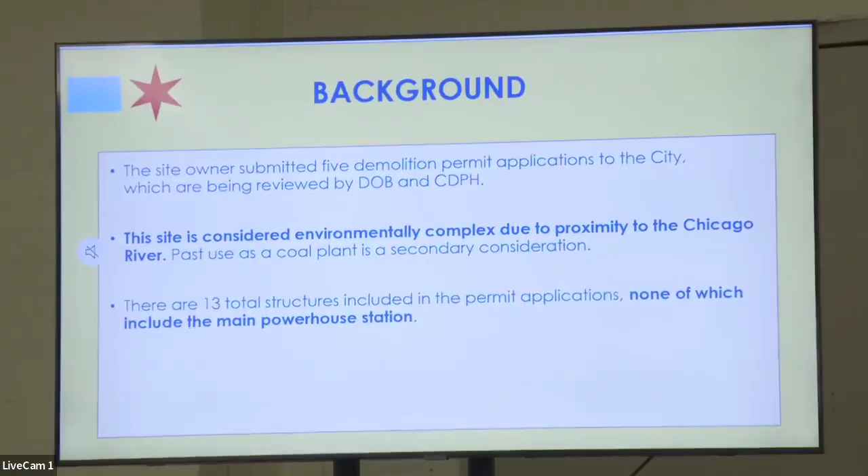So for some background, the site owner has submitted 5 demolition permit applications to the city, which are being reviewed by the Department of Buildings and the Chicago Department of Public Health. This site is considered environmentally complex due to the proximity to the Chicago River, past use as a coal plant is a secondary consideration. There are 13 total structures included in the permit application, none of which include the main powerhouse station.

And with that, I will turn it over to Commissioner Hopkins for the Department of Buildings.

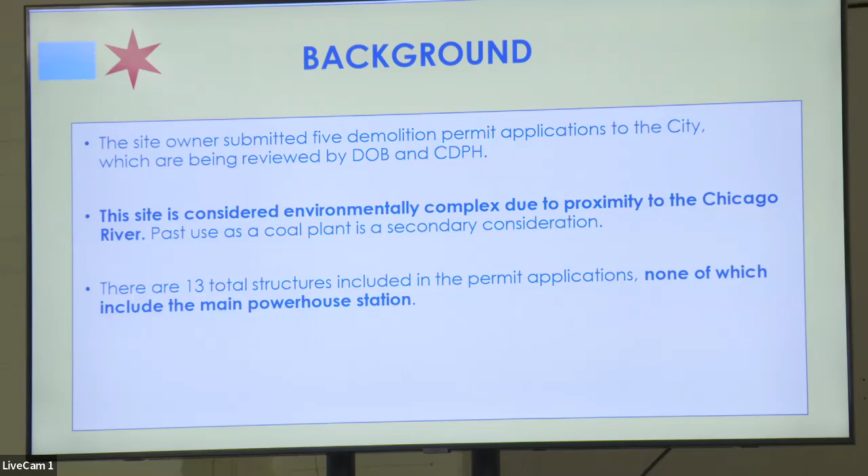Good evening. I am Marlene Hopkins, Department of Buildings Commissioner. Thank you for joining us to discuss the partial demolition of the Fisk generating station. For environmentally complex demolitions like this one, my department works in continuous coordination with the Chicago Department of Public Health to ensure every phase of the demolition is executed safely and responsibly.

This collaborative approach reflects the lessons we've learned from past projects and our commitment to prioritizing the safety of Chicagoans, especially those living in communities with existing environmental challenges. We take our responsibilities seriously, not just to ensure compliance with the building codes, but to protect both the skilled workers completing this project and, most importantly, the residents who call this community home.

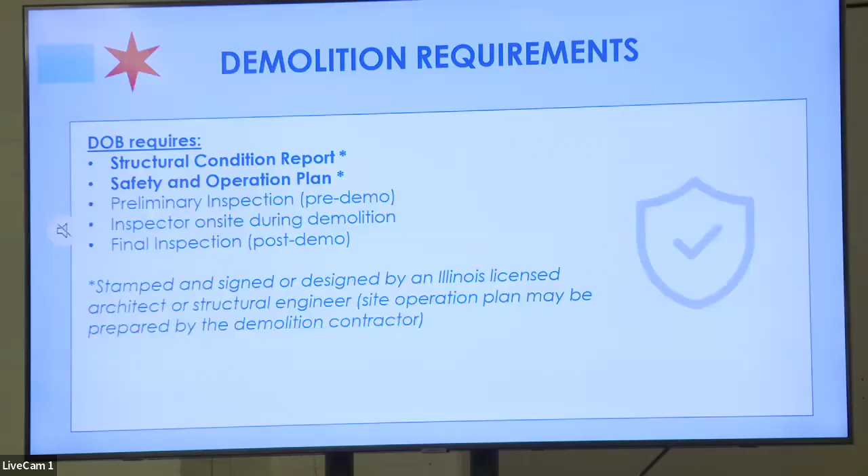We also require a safety and operation plan, which, similar to the structural condition report, must be stamped, signed, and sealed by a licensed architect or structural engineer in Illinois. It is also acceptable for the site operation plan to be prepared by the demolition contractor.

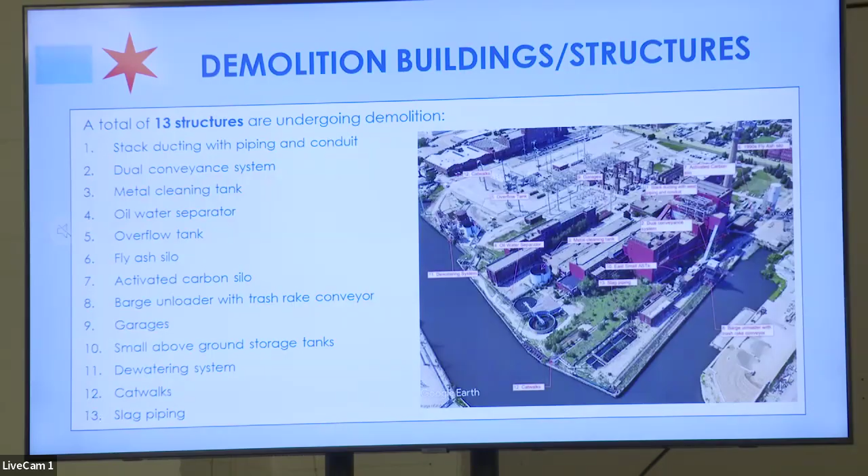Next slide. There are 13 structures to be demolished, separated into the following groups: stack ducting with piping and conduit, a dual conveyance system, a metal cleaning tank, an oil water separator, an overflow tank, a fly ash silo, an activated carbon silo, a barge unloader with trash rake conveyor, some garages, small above ground storage tanks, a dewatering system, numerous catwalks, and slag piping.

Next slide, which should detail the permits information. So the 13 structures are separated into 5 groups. These groups correspond with the submitted and filed demolition permit applications, and the numbers are cited below each group.

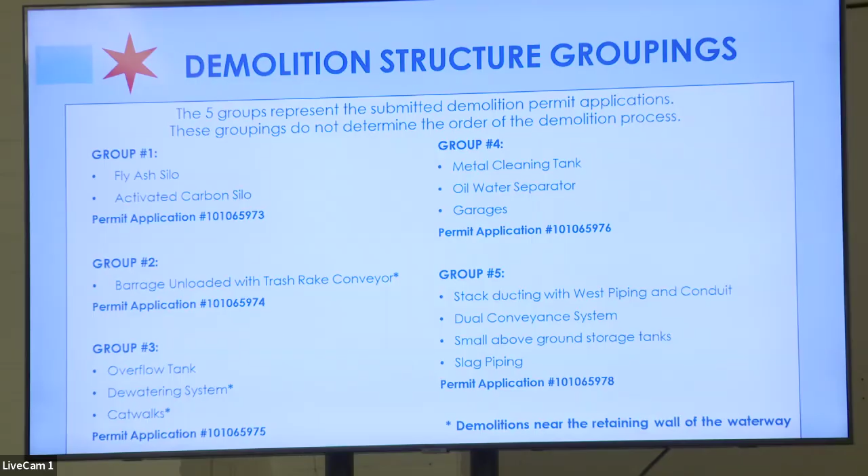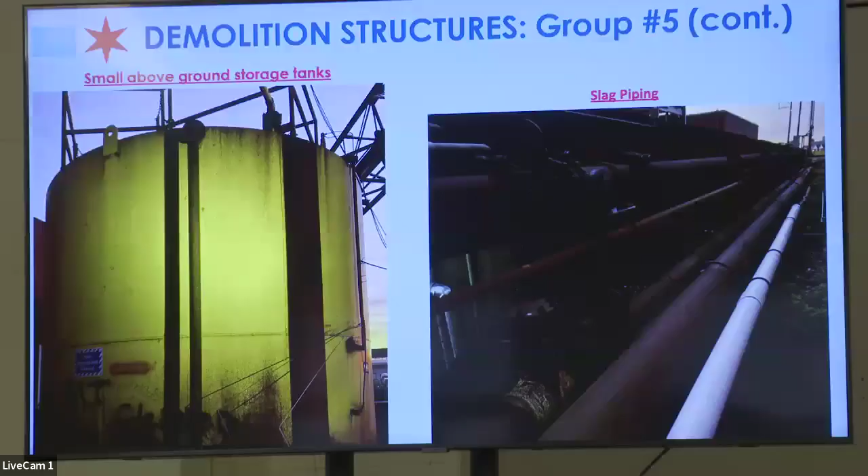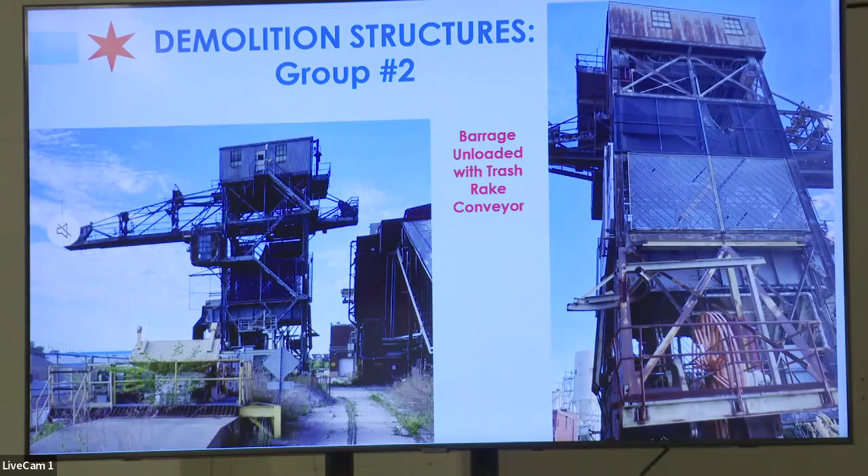Next slide. We're on number 2. Demolition structure groups number 1 - next slide, because it's the 5 groups. Group 3 - you want me to go through all of them? You want to go back? Go back to group 1. Okay, group 2, which shows the structures associated with that permitting group. Group 3. Group 4. And group 5.

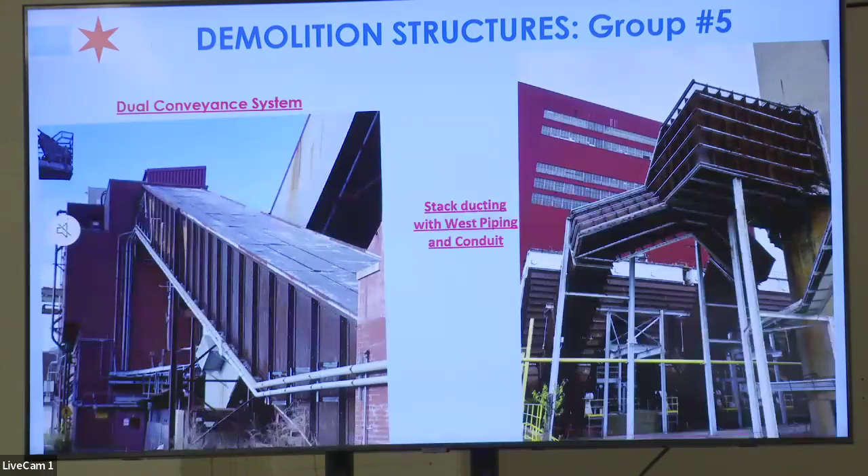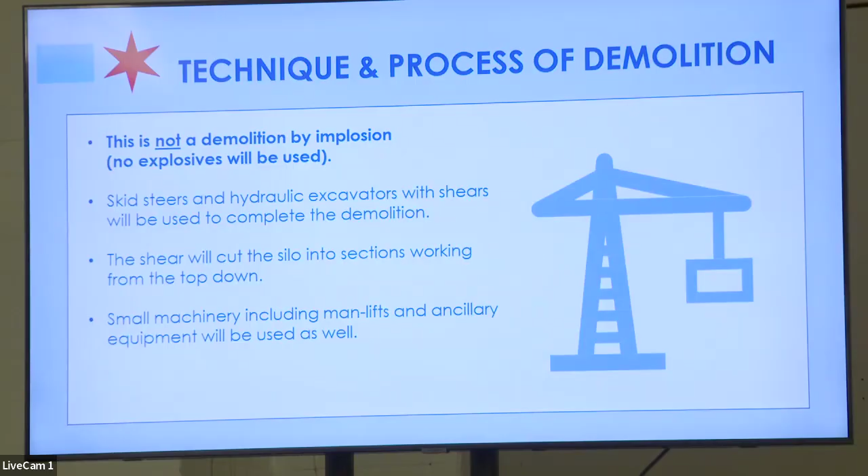Next slide. This is not a demolition by implosion, meaning no explosives will be used. The mechanical demolition technique for this site utilizes skid steers and hydraulic excavators with numerous attachments. The grapple is one of the attachments. A hydraulic breaker is another attachment, and there is a processor attachment. In addition, there's a skid steer and a front end loader. So this is a mechanical demolition with no explosives being utilized.

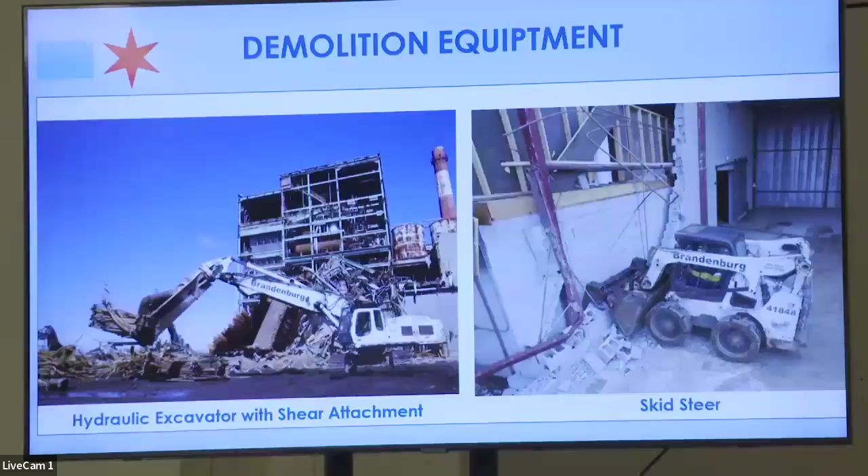And at this time, I would like to thank you, and I will pass it over to my colleague, Commissioner Dr. Ige.

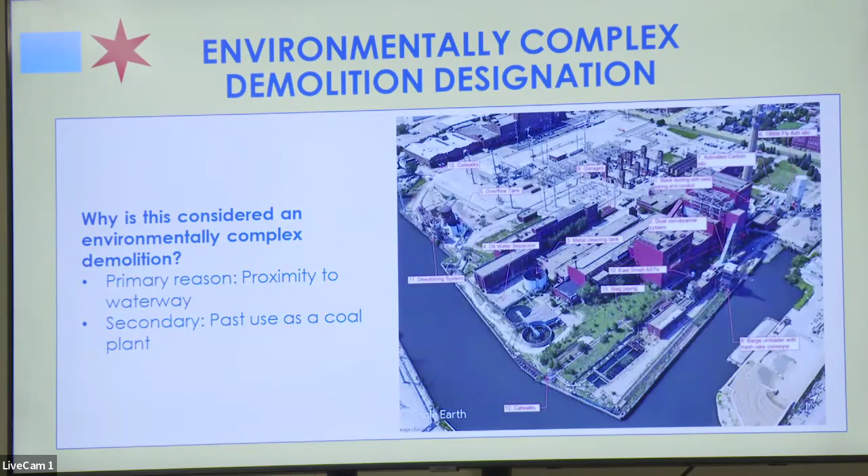The designation of environmentally complex is done by the health department because of our interest in public health. I have explained the two reasons why we're interested in this particular demolition, and we have tagged it as environmentally complex: proximity to the waterway, and past use as a coal plant.

When the application is submitted to us, there are a few things we look out for. Asbestos must be abated before the building starts coming down—that has been completed. Second, any hazardous waste must be removed before you start bringing things down. We don't want things getting into the water or into the air. That has also been completed.

Inspect for lead, which is usually in the paint. We check before demolition if there's any chipping paint, etc. That has been inspected and completed before the demolition happens. Recycle and reuse at least 50% of uncontaminated construction and demolition debris—we want to be good stewards of the environment. If something can be reused, we want it to be reused, but that is after the demolition. Things that can be salvaged during or after the demolition should be salvaged.

So dust—by far this is what you are most concerned about. We get tons of questions. There is not a single day that I don't get an email about somebody worried about dust. So it is incumbent upon me to make sure that dust is not getting into the community and causing concern.

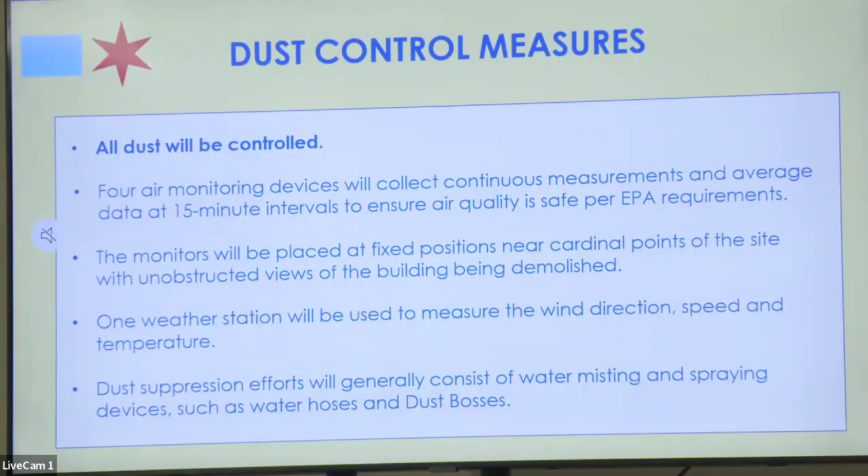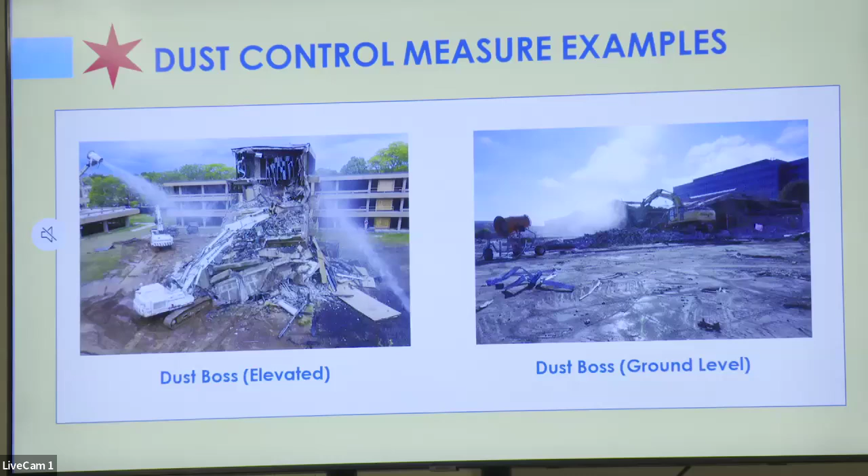Department of Buildings and Department of Public Health, we are twins in this process. We are always together. If our inspector is not there, DOB inspector is there, but our inspectors are both there. So when people ask me, is our inspector there, it is not just me. There is my inspector and there is a DOB inspector on site during demolition.

That is what we have committed to do. Before demolition, to make sure all requirements and controls are in place, they will be on site every day during active demolition hours, Monday to Friday, 7:30 to 4. We don't have overtime hours.

And they observe the demolition, they are on site. So we reassure our community we're there with our partners. DOB and CDPH have full authority. If they observe something, they can flag it for us. If we observe something, we can flag it for them. So 2 inspectors on site every time, every day. That is the agreement. They both have authority to stop any work and correct issues as needed.

Correcting issues is where we focus. If there is a problem, we want to identify it and fix it. If it cannot be fixed or they refuse to fix it, then things escalate. But if we identify something, we want to fix it and say, hey, no, Dust Boss, water, more water, clean this up. They do it, we're fine. They don't do it, we have a problem. Next slide.

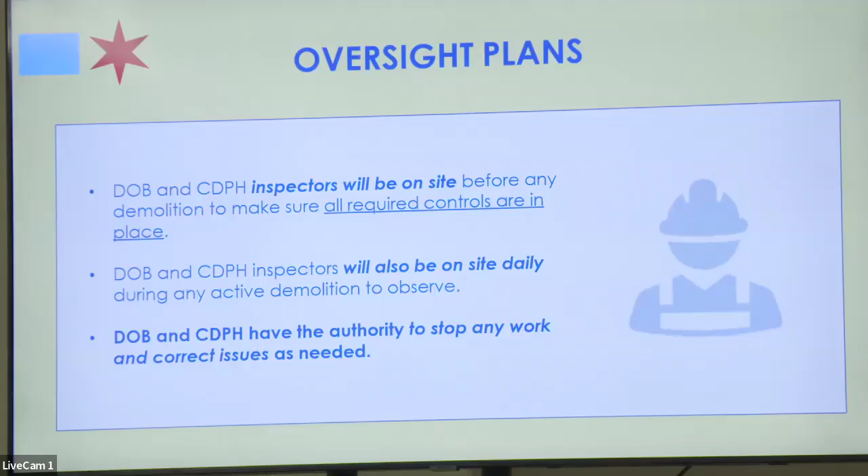So we are going to pass this to the contractor so they can give you more details. I have shared with you what we look out for. Then you will hear from them what they actually do. And we will again be on site to be sure that they are doing what they are supposed to do. Over to Brandenburg.

All right, you hear me? This is Paul Pujan with Brandenburg, project manager. Yep, we can hear you. Okay, so there is a slide deck, if they can go ahead and get that going.

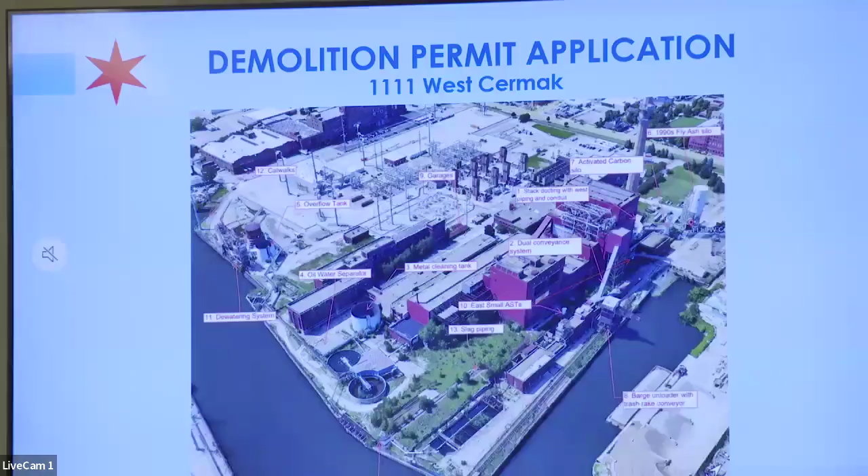So as already been discussed, there's 5 permits submitted for this work, and it's grouped as it was previously shown. The work, as it was kind of described, is all mechanical. It's going to be primarily the taller structures like the conveyors, the silos, barge unloader. These will be done. We'll bring in some cranes.

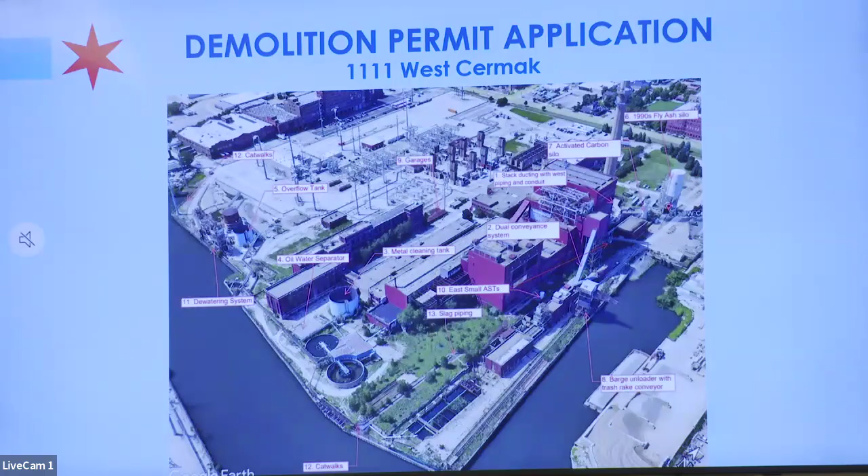We've already performed the engineering analysis for this, and it'll be a systematic removal in sections. We'll bring, say, the high angle conveyor, the barge unloader, down in sections, down to ground level. And at that point, we use our hydraulic excavators with shears to process the material so it can be loaded out into trucks and sent to recycling centers. So I can go to the next slide.

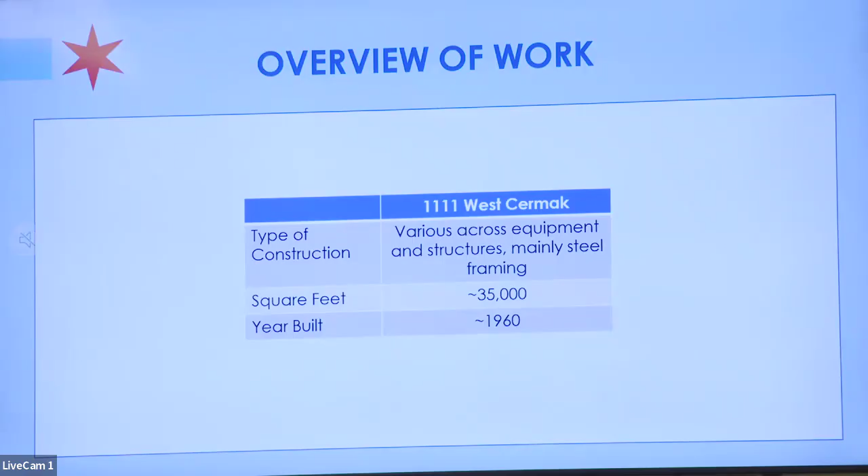Okay, so this is basically talking about all the various structures that we'll be demoing. Next slide.

So everything, starting in about April, we started reviewing the equipment and the structures. We've had the engineering analysis done and submitted to the city that everything is good for demolition. All the chemical and universal waste was removed. The universal waste includes things like light bulbs, any chemical like spray paint, things of that nature. That's all been removed and disposed of. Our engineer was on site and gave us a stamped letter saying structures are sound.

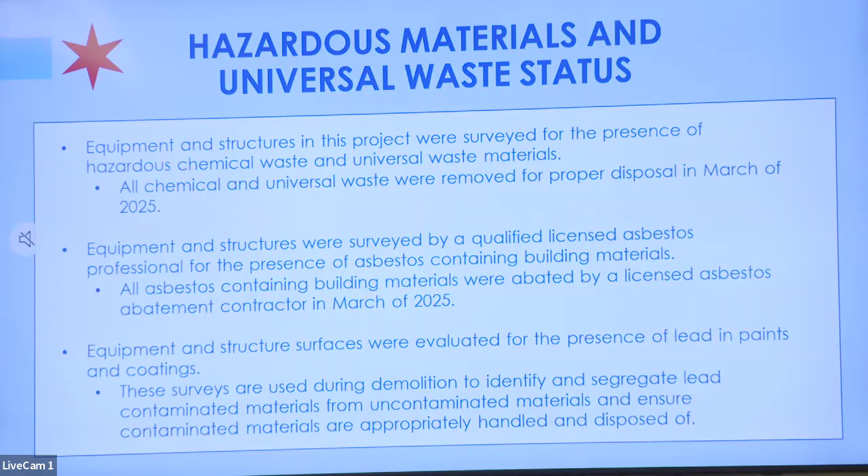All the asbestos was removed by Brandenburg, and we finished that work in March. And everything was evaluated for the presence of lead. And so anything that was identified will be segregated and not contaminating other materials. Next slide.

As we mentioned, the controlled demolition will primarily use laborers working out of manlifts, and we'll be torch cutting using cranes. Then as we bring the higher structures down, the shear excavator will be able to take the remaining structure down to grade.

We're estimating a couple months, depending on when we get the actual permits and when we can start. So we're approaching fall into winter. Hopefully it's not a bad winter.

There'll be no below grade removal. No soils will be impacted. I know there were some questions about the water, so we will be placing a barge for any work that is right next to the waterway. We'll have a barge there in case something were to fall off from the land side—it'll land on the barge, not in the river. We use dust boss and water hoses, and as they mentioned, our air monitoring station.

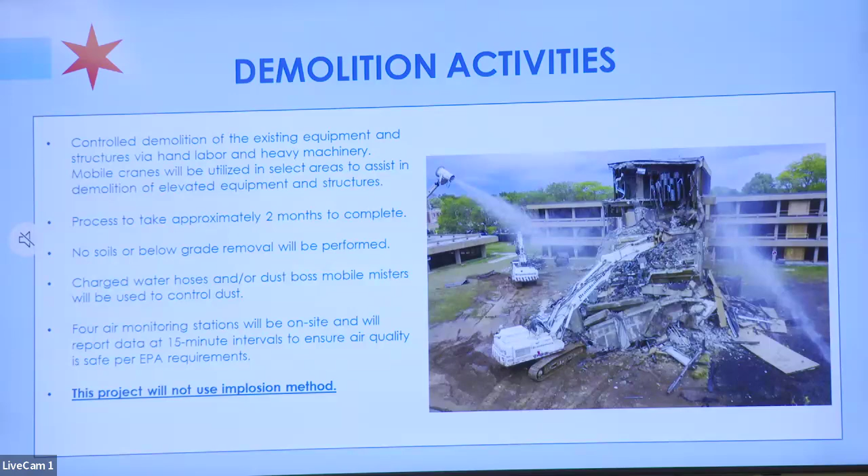All the scrap metal that will be generated will be sent to local scrap recycling centers. We'll be planning to work Monday through Friday, 7:30 to 4.

The demolition truck traffic comes out the standard route for the site, which is off Cermak. The truck traffic won't be that heavy—probably during the peak, maybe 4 or 5 loads a day. We'll inspect the track out for the trucks leaving the site, make sure they're not carrying any mud or anything on their tires, keep it clean, and we'll sweep the road as necessary.

And then the last point there is barges will be used along the waterway to prevent anything from entering the waterway.

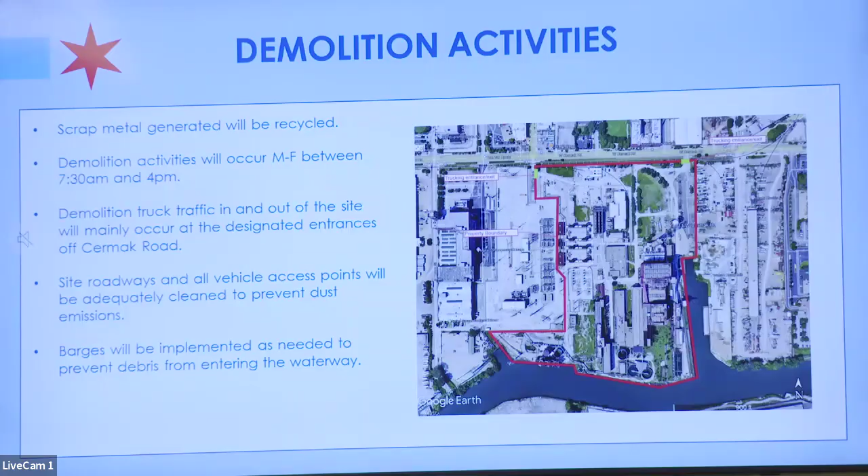So the areas that we demolish will be cleaned, any openings will be sealed, everything will be left in a safe condition, and that will be the completion of our work for NRG, or Midwest Generation.